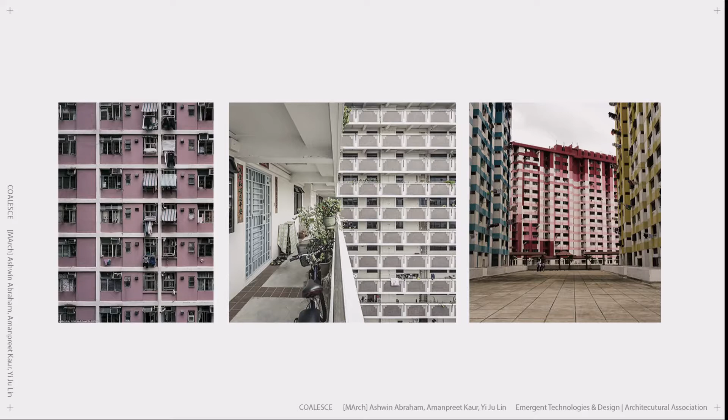Along with its efficient use of space and resource, mass housing still has several flaws. That is, lack of social identity and communal space. These residential neighborhoods will not have the opportunity to adapt to future change over time. Overall, mass housing fails to address certain aspects of housing such as social cohesion and personal identity.

This leads to the question: what if the building can be reconfigured over time as a potential solution to the existing problem of inflexibility, and the people can participate in the design process as a means to directly address their spatial needs, with an intelligent system for helping people find a suitable solution. That is our research project, Coalesce.

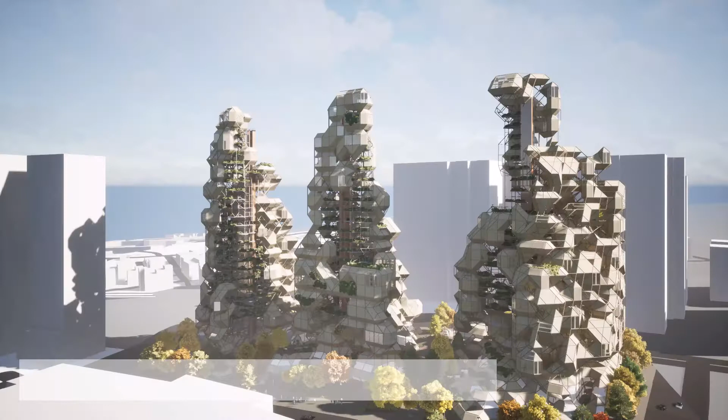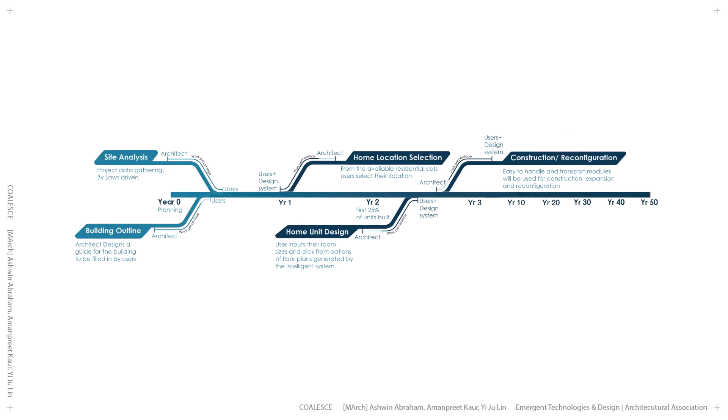Coalesce is a 400-home residential neighborhood that grows and is able to reconfigure according to the needs of inhabitants, owners, and the surrounding urban context over 5 decades. The residential development is expected to grow, shrink, and reconfigure over 5 decades. Different stakeholders such as architect, government, assembled workers, user, and multi-users will be involved in different stages throughout the years.

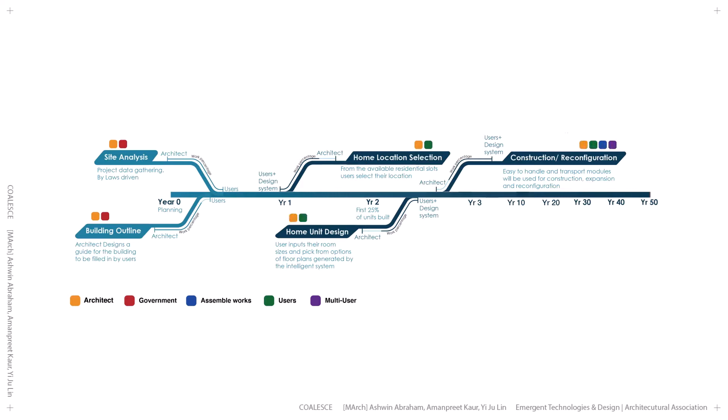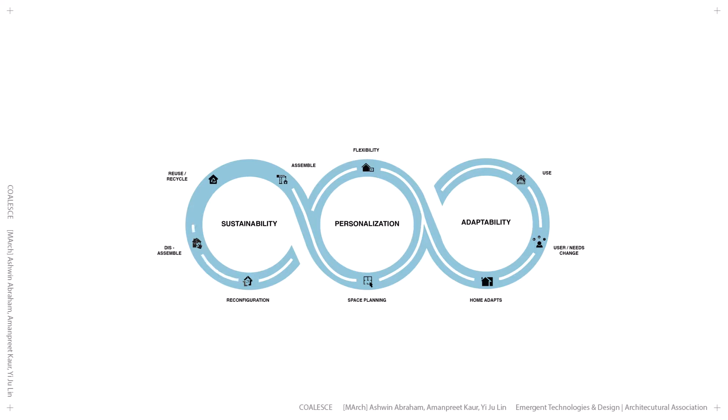We propose 3 design strategies: sustainability, personalization, and adaptability, to change each part, from assembly to space planning, usage, and user needs change. The home adapts through flexibility, reconfiguration, disassembly, and reuse or recycling.

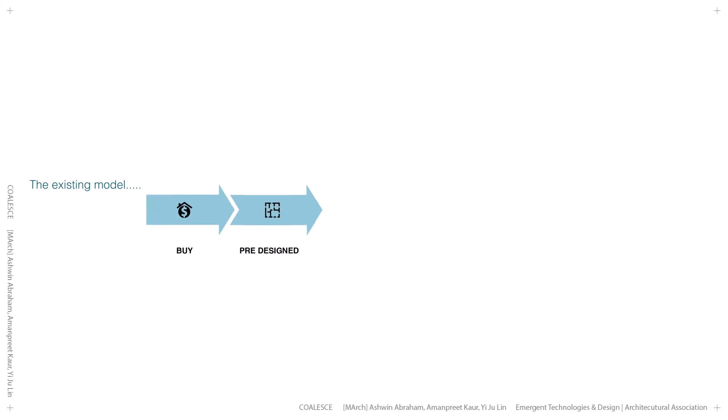We present a new degree of personalization. The conventional model is linear, has minimal user customizability, and is unable to grow or shrink in response to family size, and is replaced by a more cyclic one.

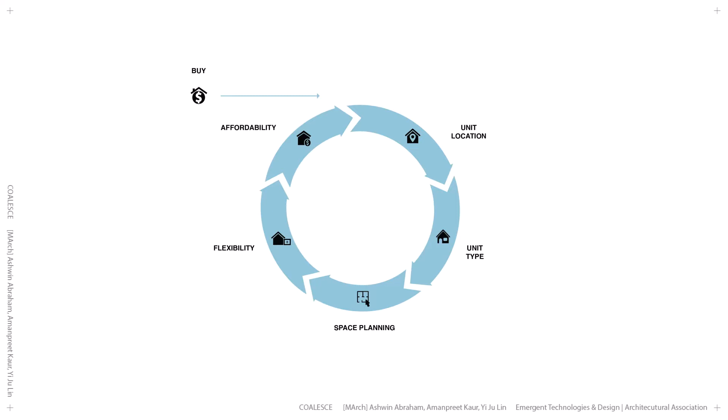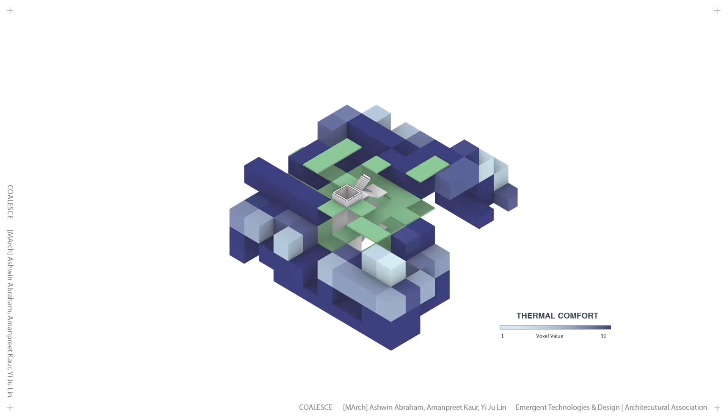Consider a user who is selecting their home voxels in a residential neighborhood. He has a certain family size and budget. The residential development's voxels would have values assigned to them based on livability factors like thermal comfort, views, and certain attractive community features within the development. A clustering algorithm presents a range of options for home locations and their cost based on voxel values.

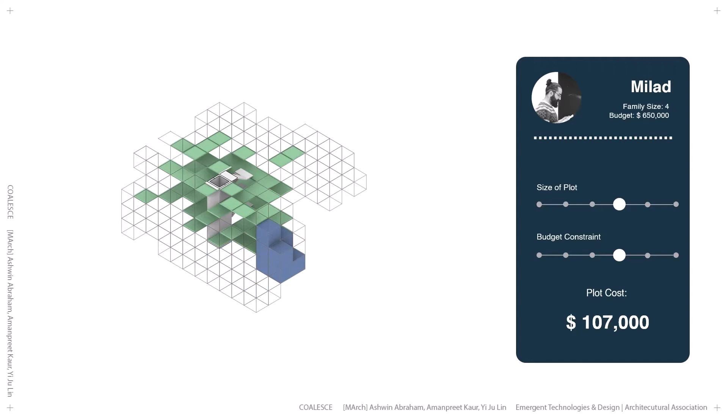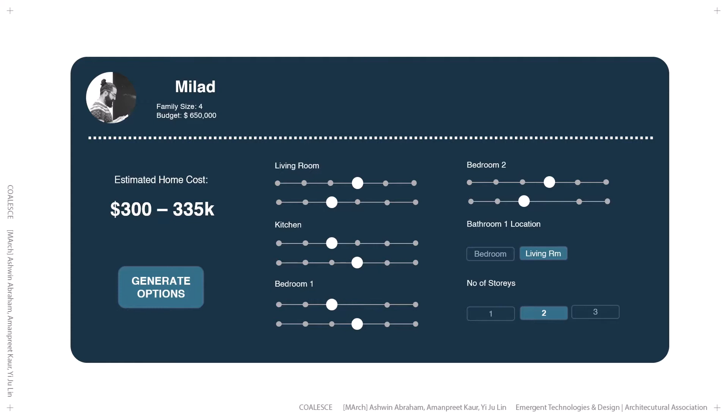Next, the user sets parameters for the size and location of the rooms of their home. A floor planning genetic algorithm generates 3 options and presents them to the user to pick from, along with their performance scores and cost of construction.

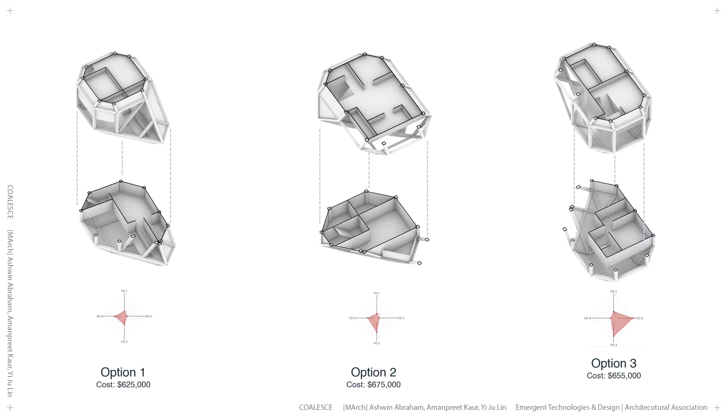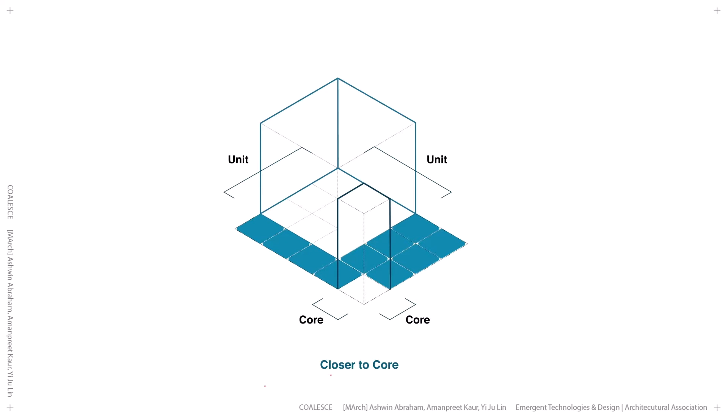In the floor planning algorithm, the following features are optimized for: thermal comfort of living spaces, proximity of built area to core, minimal cantilever, ventilation of living space, minimal internal circulation, and improved views for living spaces.

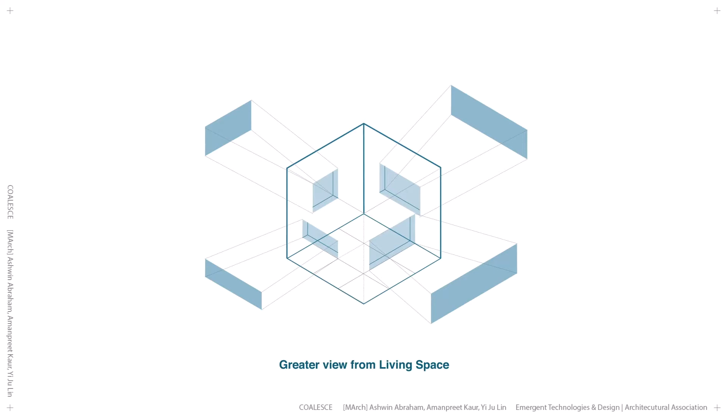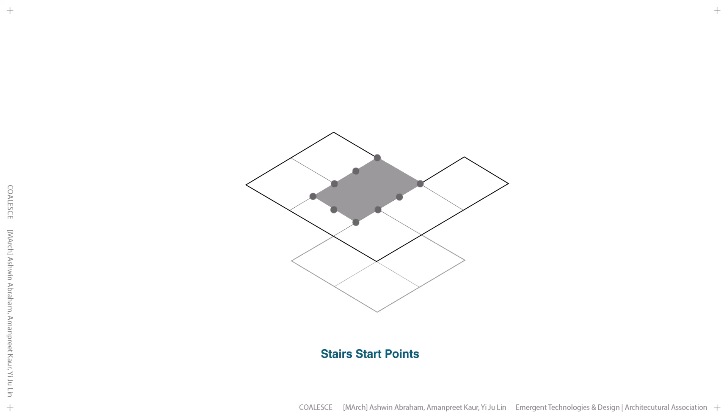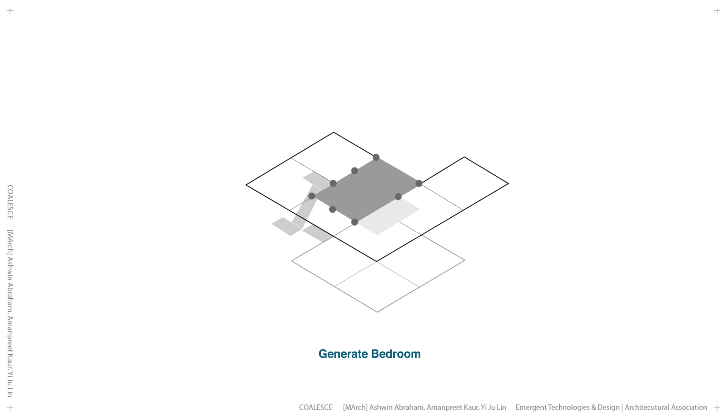Within the user-selected plot voxels, a shape grammar-based evolutionary algorithm is run. Genes are used to select the position of each room's start points and the position of room rectangles. Central spaces such as living and dining rooms, internal stairs and internal corridors are generated first. The algorithm runs hundreds of iterations, learning over time, and outputs 3 good unit layouts that respond best to its unique context in the built mass.

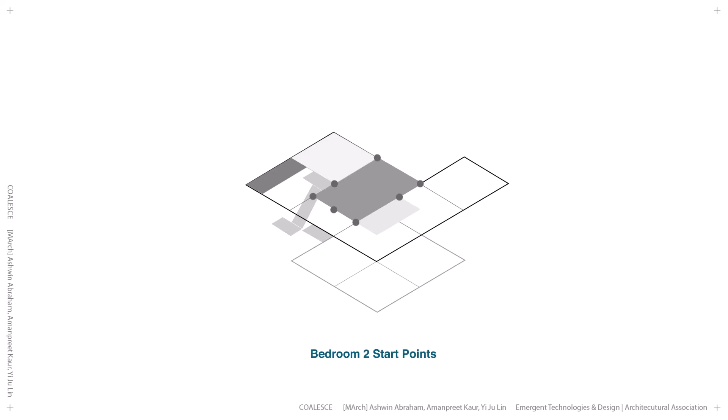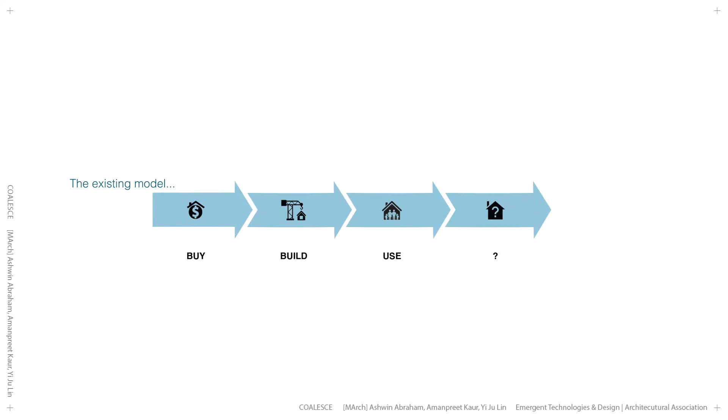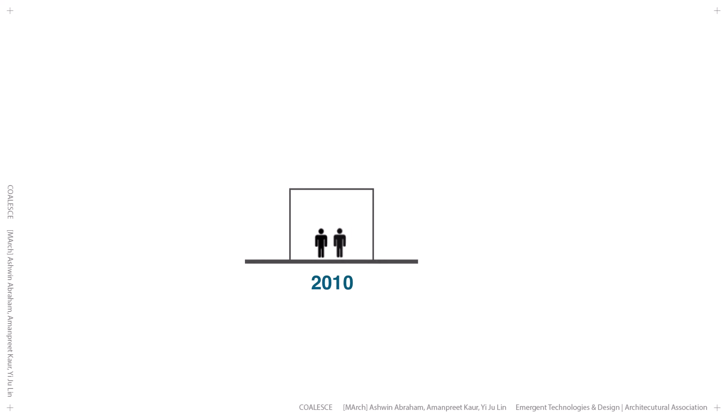Our next strategy is sustainability through the proposal of a new building system. A study of the existing building model shows that the life cycle of the material in use is not accounted for, leading to wastage and abandoned buildings. There is an expected change in spatial requirements to occur over the years, which the existing linear model doesn't accommodate, resulting in an endless succession of destruction and rebuilding.

The proposed strategy is to work with a component-based system, designed to achieve flexibility in assembly, disassembly, and reuse, allowing for easier, faster, and more robust building developments through efficiency in prefabrication and manufacturing techniques. The proposed building model explores a more viable way to think about sustainable construction. Creative reuse, reconfiguration, and designing programmatically versatile buildings that last is the objective of this research.

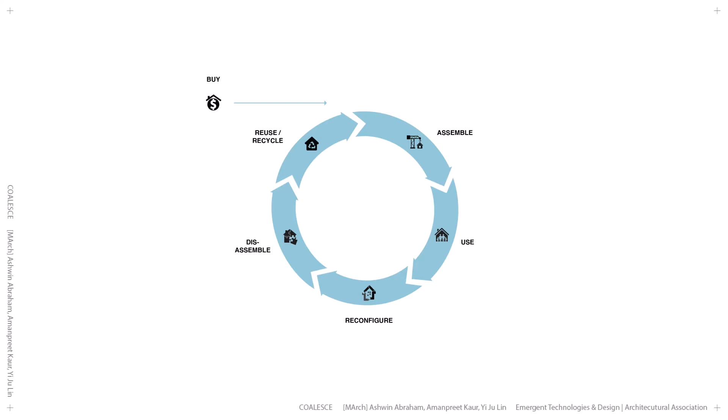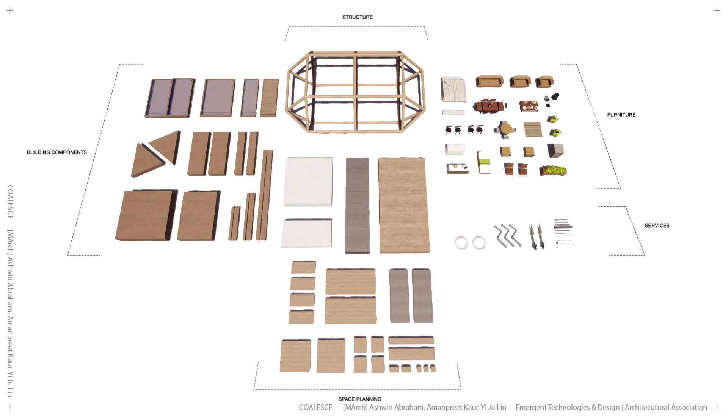The component-based system consists of the structure, building components, components for spatial planning, services, and interior detailing. The construction process begins with the extraction of timber and prefabrication of components depending upon user customization, which is then delivered to site where the assembly takes place to form the ready home. This method allows for fast production, which is essential considering the increase in housing demand.

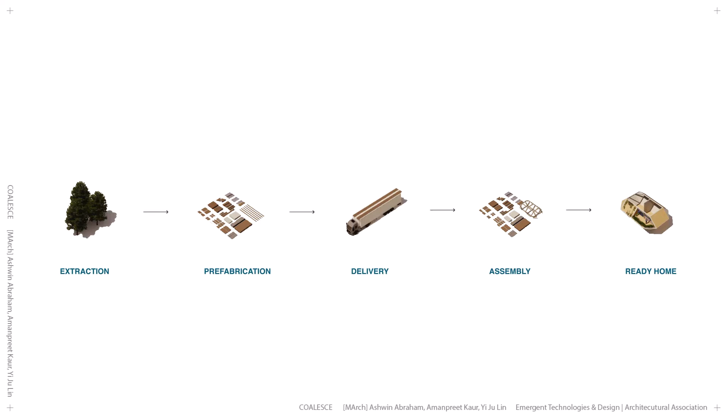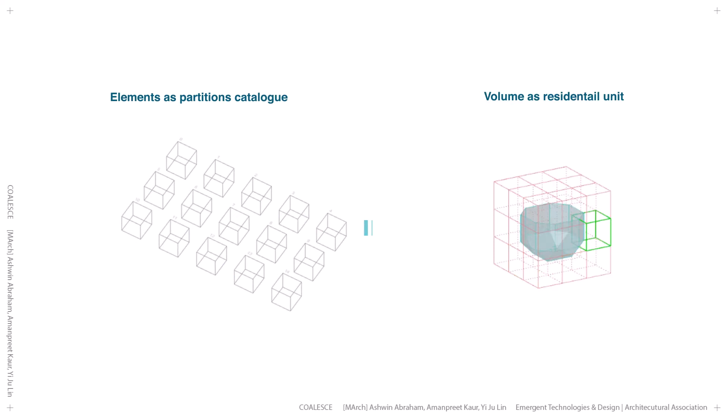It also allows for freedom of customization and quick assembly, which we can provide the users with. For the design of this component-based system, we applied a marching cube algorithm which uses a number of elements to create an enclosed volume.

The elements form the components, and the resultant enclosed volume is the residential unit. Once the final floor plan is selected by the user, the habitable volume is extracted from it, on which the material system algorithm is applied.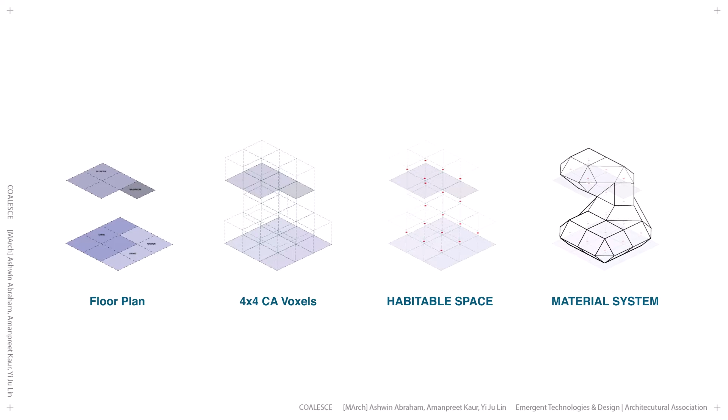A final unit morphology is obtained comprising of various building components. The unit typology matrix highlights the morphological variations that can be achieved based on various floor plan clustering scenarios that emerge from user personalization.

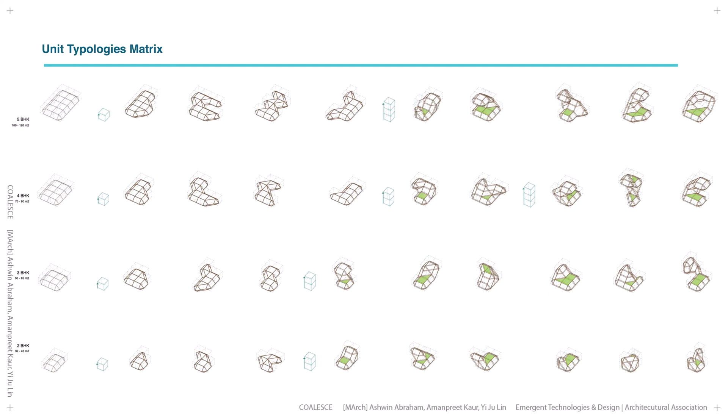Vertical distribution of spaces within a unit is explored as a strategy to enable porosity and reduce the density of the resulting building mass. As highlighted, such a distribution creates interior space and terraces of varying scales and spatial qualities.

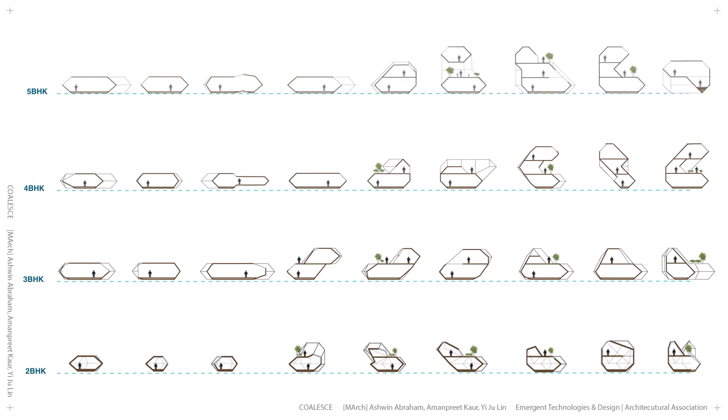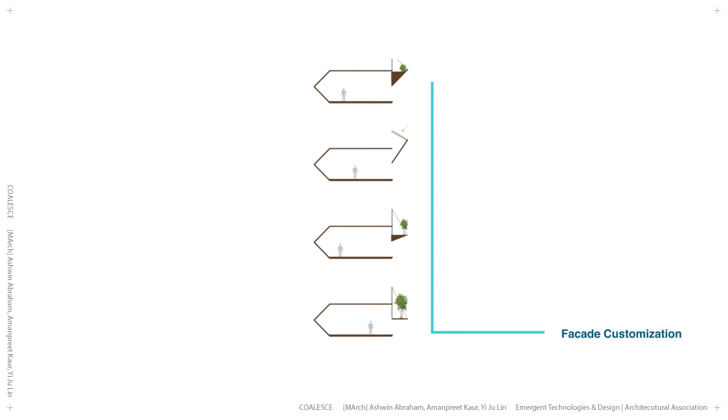Each unit has a unique morphology and spatial character as a result of personalization. Each user is allowed to customize the unit facade from a provided catalog depending upon their preferred utility of space, such as terrace skylights and vertical gardens.

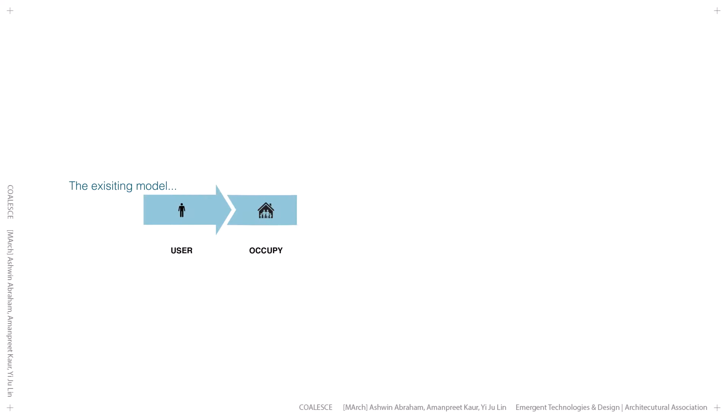Our third and last strategy is of adaptability. There is very little consideration of the user and space relationship in the existing building design model. Through our proposal, we aim to provide an account for change in demand through adaptable spaces and space trading over the years, defining and enhancing a relationship between users and the space.

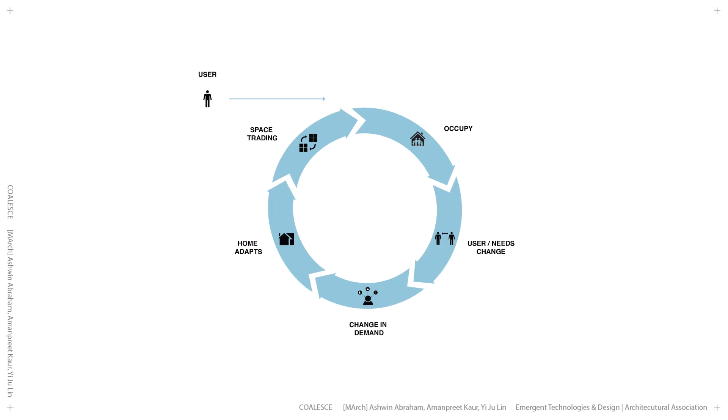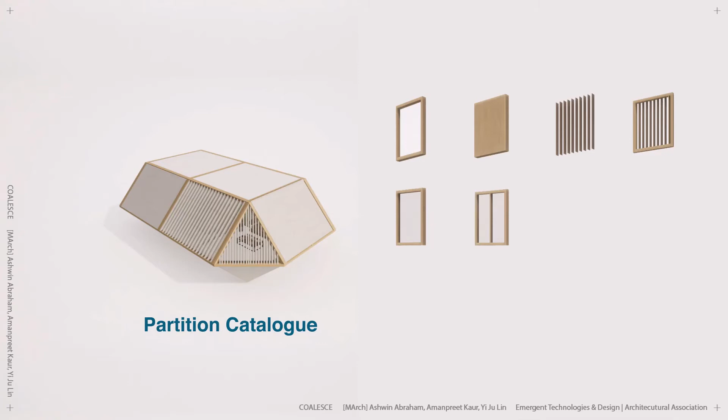A unit is formed by its structural components first, followed by the exterior panels, internal partitions, and space-making components. The user can further personalize their space by selecting through a range of partitions through a provided catalog. This catalog is designed by the architect in relation to the context, resulting in unit formations which are environmentally responsive.

Users can opt for terraces, roof gardens, large openings, etc., based on their seasonal requirements.

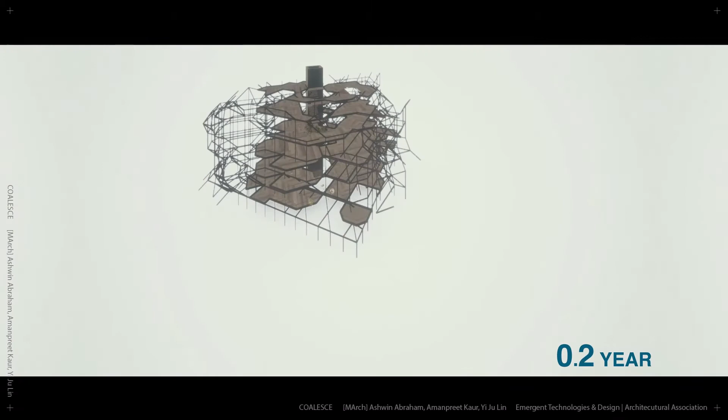Units can be clustered onto site over the years. As and when the units are built over time, unit terraces can be activated as public spaces depending upon adjacency and edge conditions. The involved users come together and make decisions at the communal level on the nature and scale of space to be created.

This approach allows for users and other stakeholders to be more involved in space making for changing social structures of society.

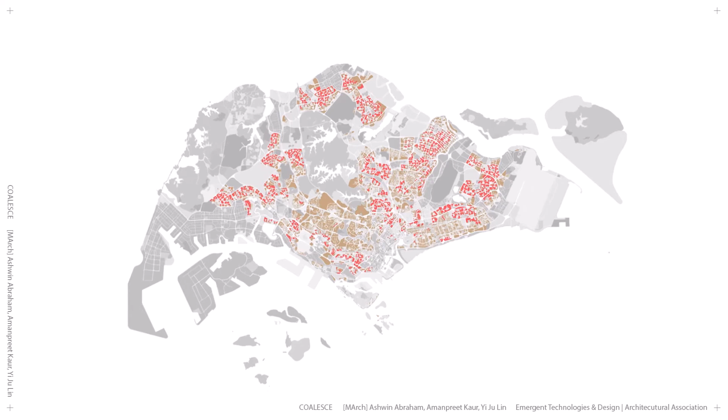In Singapore, it has high density of mass housing. 80% of Singaporeans rely on HDB flats. Such high density of mass housing is why we selected Singapore as a site for our project to test the workflow.

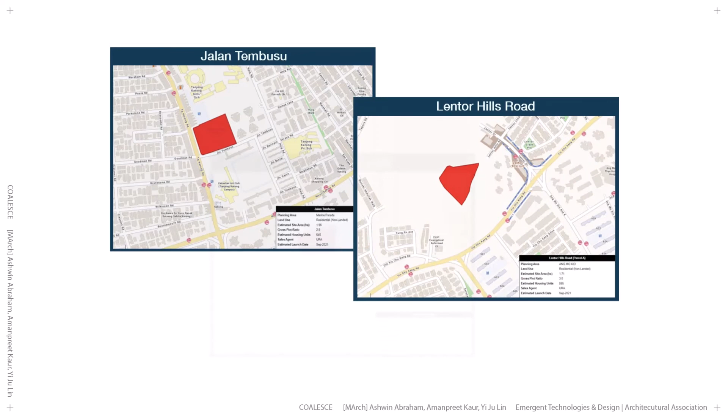The GLS program in Singapore laid out available sites for development, and we use this as the guide for site selection. We picked one of these proposals that is Dairy Farm.

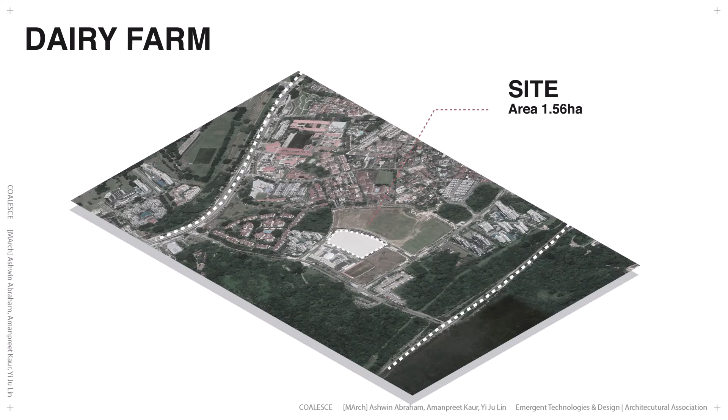Nearby this location has 2 national parks, 2 convenient expressways, and one international school. The area is about 1.56 hectares, and the estimated unit number is about 385.

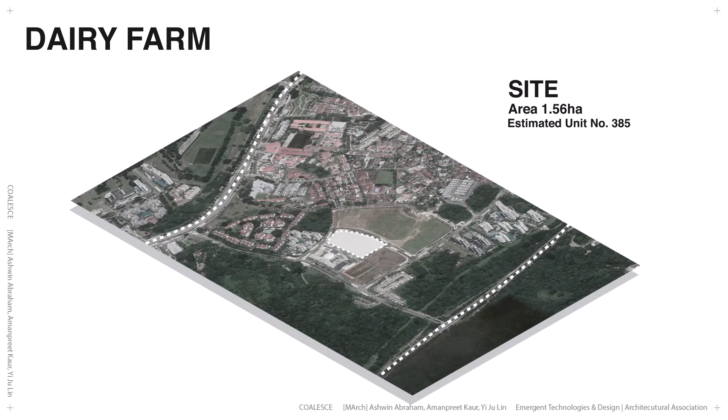The population in the region is increasing over the years, and the majority of the population's ages is around 15 to 64. The Singapore Building Guideline will be referred to for guiding the setup of logic and rules for the experiments.

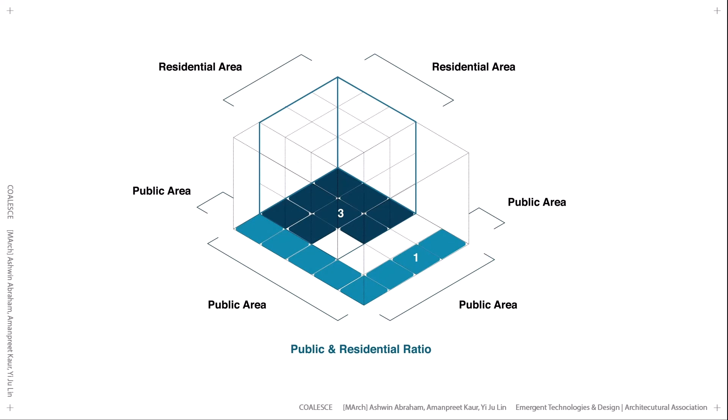A tower outline is designed as a guide for users to build their homes. A genetic algorithm is used for design, prioritizing reduction of thermal radiation for homes, achieving the target built area, achieving target public-residential ratio, and reducing self-view.

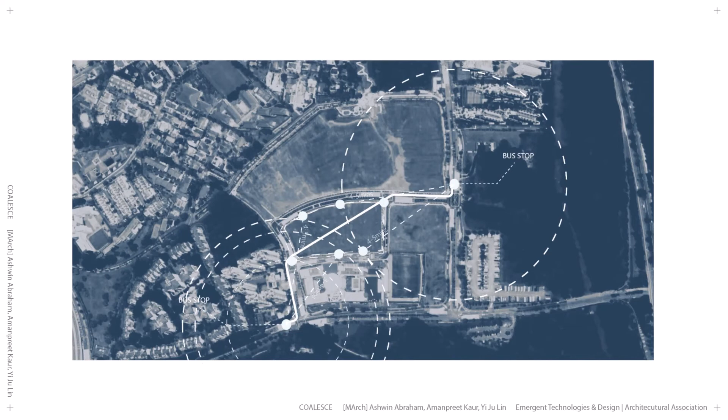Based on the surrounding pedestrian and public transport networks, a primary site axis is defined. Secondary axes fragment the large footprints.

The building footprint is extruded upward, tapered, and scaled by the genetic algorithm. A three-dimensional cellular automata algorithm populates the outline, and residential and public voxels are defined.

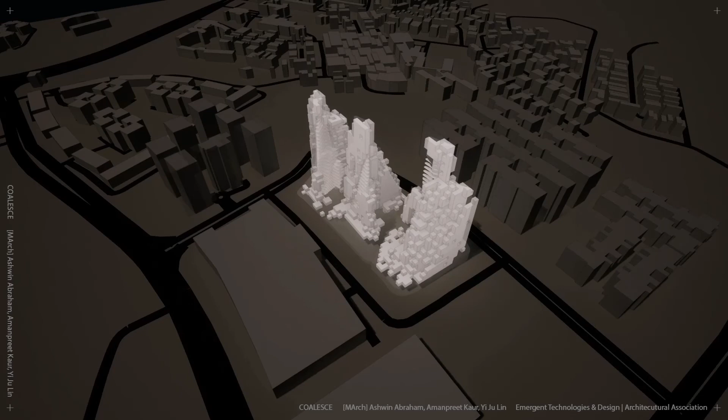At the heart of each of the three towers is a circulation core. The material system defines a permanent framework. Individuals build onto this predetermined framework over decades, using the floor layout algorithm and a kit of parts as infill panels.

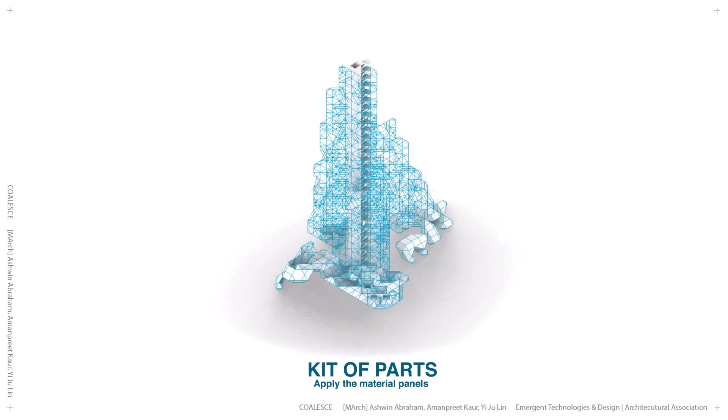The framework and residential voxels are predetermined, and therefore allow prediction of the location and magnitude of structural loading, while maintaining user freedoms by allowing them to customize infill panels. Thus, a finite element analysis can also be conducted to predict structural behavior.

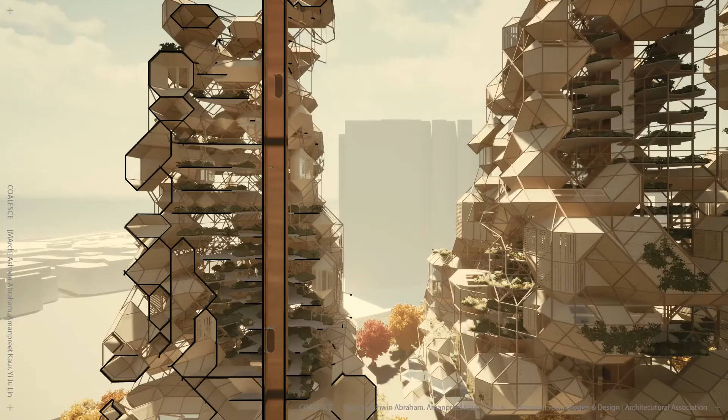This is the section of the three towers. Public space is located in the center, surrounded by the living units.

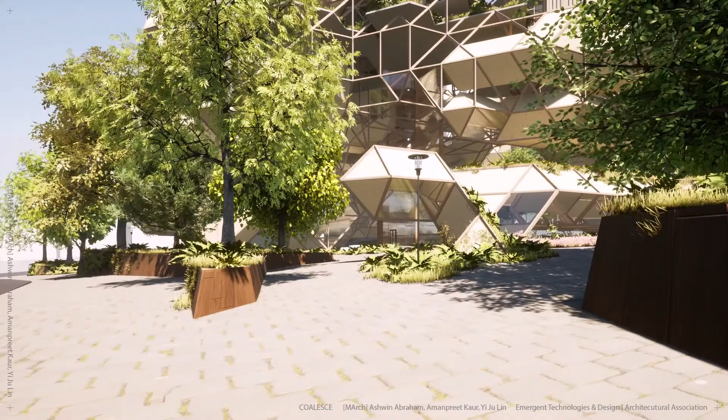And finally, let's take a minute's walk through this entire space.